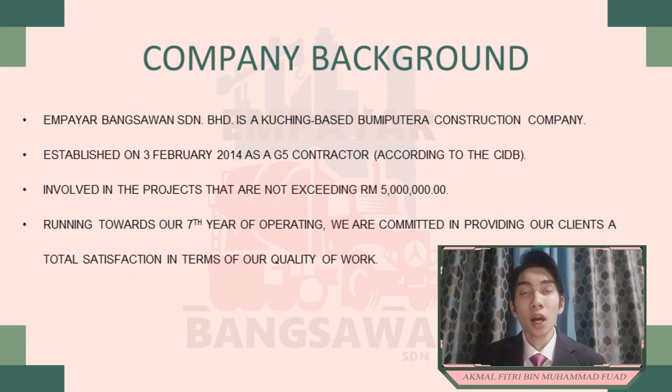I'm Akmal Fitri, and today I'm presenting Company Profile. First, Company Background: Empayar Bangsawan Sendirian Berhad is a Kuching-based Bumiputera construction company established on 3 February 2014 as a G5 contractor according to CIDB. We are involved in projects valued at not more than 5 million ringgit. Running towards our 7th year of operation, we are committed to providing clients total satisfaction in terms of quality of work.

Next is company mission and vision. Our mission is to provide the best construction to customers using our expertise in the design, manufacture and installation of building components, while our vision is to become one of the top Bumiputera construction companies in Malaysia.

Corporate information: Empayar Bangsawan Sendirian Berhad was started by our CEO, Muhammad Karani bin Idrus, and our DCEO, Angelina Belayau Anak John, in 2014. After that, they invited 8 people who specialize in construction to be part of the company's board of directors. With the assistance of dedicated professionals and staff, we offer specialty in various forms of construction including residential, commercial and industrial buildings. This is our company organization chart.

As mentioned, our CEO is IR Muhammad Karani bin Idrus, our DCEO is Angelina Belayau Anak John, and there are 8 other members of the Board of Director: Iffa Hazirah Izzati as Head of Human Resource Management, Melcom Mujim as Head of Project Department, Muhammad Ainim Shamim as Head of Quantity and Estimate Department, Patrick Carlos as Head of Land Surveying Geomatic Department, Bradley Terence as Head of Financial and Account Department, Ain Mishatul Wadah as Engineering Department Director, Noor Iman Anisha as Head of Building Safety and Building Maintenance, and Akmal Fitri, which is me, as Head of Building Plan and Contract Department. As of today, our company consists of 20 main staff and 10 supporting staff, each with their own responsibility or role in the construction process.

Meanwhile, from the financial institutions, we have borrowed 750,000 ringgit from two different banks, CIMB and Maybank, which totals up to 1.5 million too. Therefore, 1.5 million from the shareholders and 1.5 million borrowed from financial institutions totals up to 3 million ringgit. This is a list of machineries owned by our company.

Some of them are new, but most are used, second-hand. The reason we chose second-hand was to save our company budget, so we prefer to buy second-hand and used machineries. But we make sure all of it functions well and is well maintained before use, in order to prevent unwanted incidents. This is the tools and equipment that we have at the moment in our company. Most of them will be replaced manually as it is not necessary to be used repeatedly, unlike the machineries.

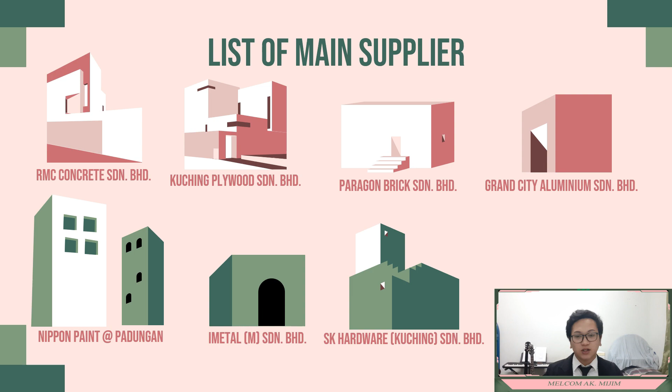This is some of our main suppliers for our construction material. They also provide credit facility to us, as we have already become part of their business partners.

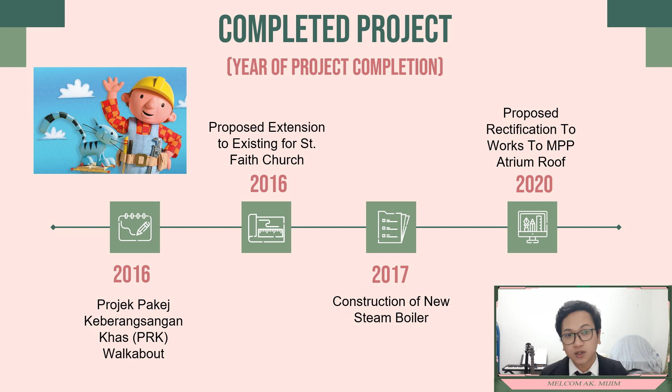In 2016, we completed a project package: keberangsangan khas PRK walkabout, proposed extension to existing St. Faith Church; in 2017, construction of a new steam boiler; and in 2020, proposed rectification works to MPP atrium roof and Majlis Perbandaran Padawan. Next stage is stage 2A, the preparation and submission of the tender document.

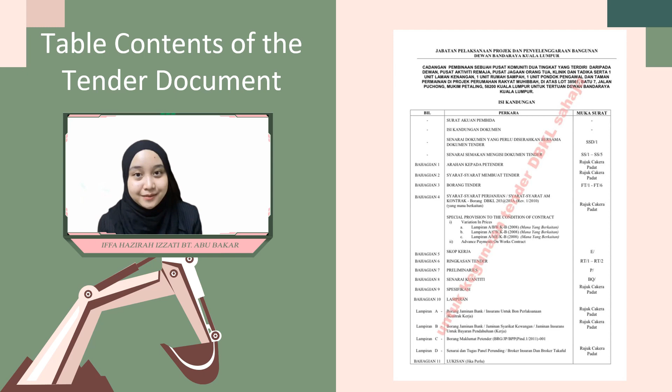This is the table of contents of the tender document from DBKL. We need to arrange all the documents based on this table of contents to avoid any mistake during tender document preparation. We also have a checklist right here.

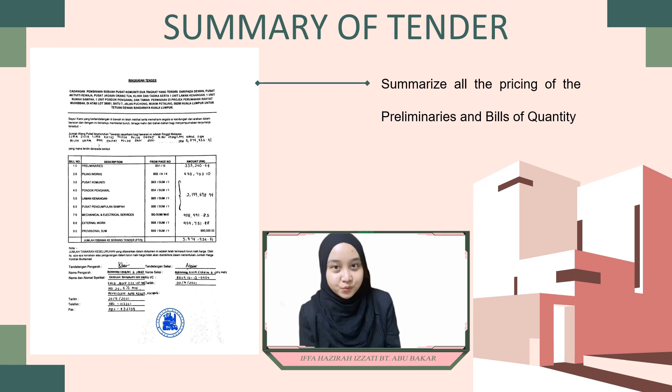The last one is summary of tender. This is the result of the pricing of the preliminaries and bills of quantity that we have counted. The total pricing is 5,574,936 ringgit and 41 cents. This is the price after we built up the rates for preliminaries work, piling works, building works, mechanical works, external works, and provisional sum.

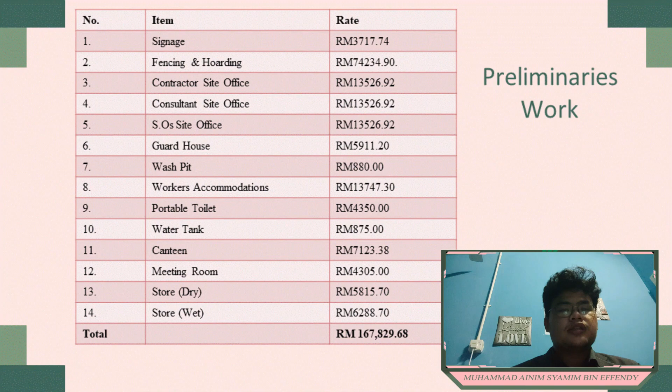The total rate for preliminary works is 167,829.68 cents. Next, in this drawing, there are all 14 items for preliminary works, the location of each item, and also the proposed building location.

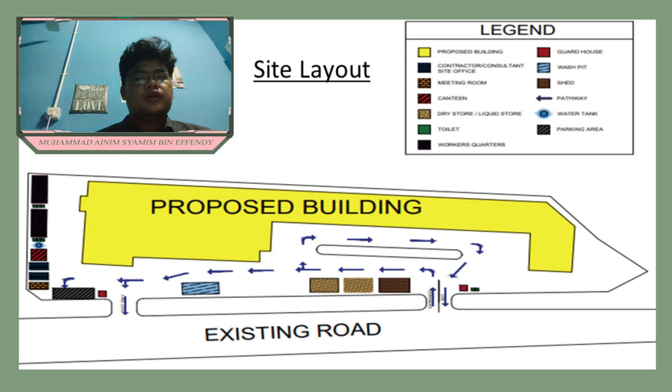Hello, my name is Angelina, and let's move on to build-up rates for building works. In general, build-up rates consist of estimation of price for works such as excavation, piling, formworks, reinforcement bar, concreting works, roofing, walls, doors, and windows.

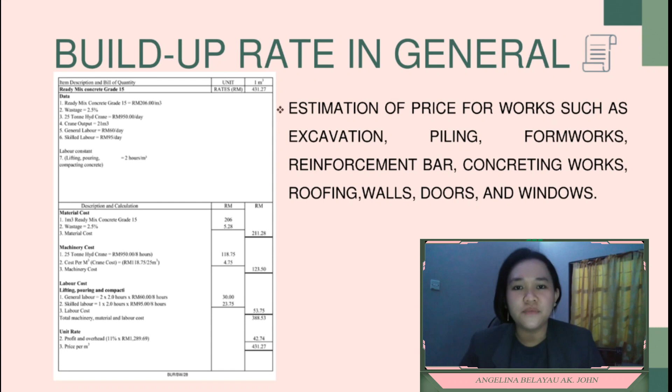Now, how are the prices in the build-up rate for building works established? Firstly, the prices are built up from material costs, labor costs, and unit rates. Sometimes machinery costs are also included, especially for works such as excavation.

Material cost is the cost of materials used to build the structures of the building. Examples of materials are cement, sand, aggregate, timber, etc.

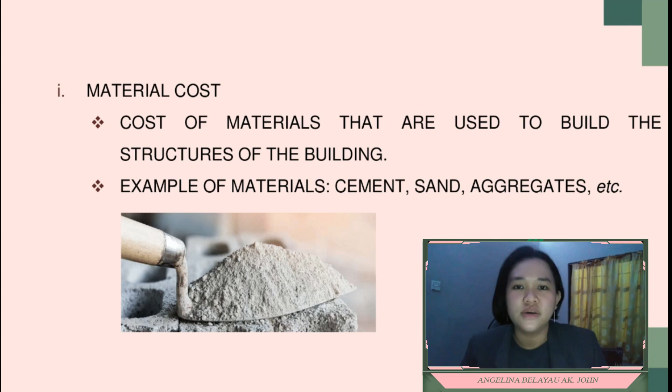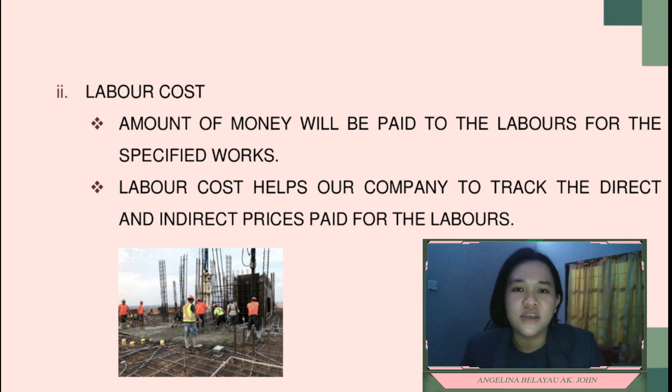Labor cost is the amount of money our company will pay to the laborers for the specified works they conducted. The inclusion of labor costs in the build-up rates helps our company track and determine the direct and indirect prices we pay for labor.

Unit rate is the allocation of monetary value to a unit of measurement for a given item in the bill of quantities. Unit rate is calculated by adding material costs and labor costs with profits and overheads. As a summary, the total build-up rate for building works is...

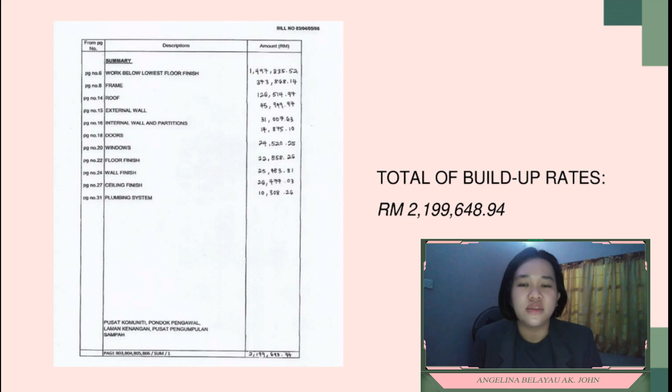2,199,648.94 cents. Next, we have the quotation of price for materials. Quotation of price is basically the estimated cost for a particular product or service.

Our company received quotations of price for materials such as ready-mix concrete, reinforcement bars, cement, fine and coarse aggregates, and others. These quotations of price for the materials are received from various suppliers such as Macro Dimension Sendirian Berhad, YTL Cement, Jong Empayar, SOCSO Enterprise, and other suppliers.

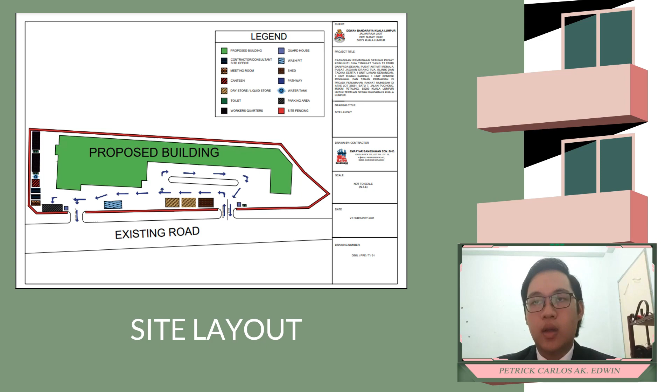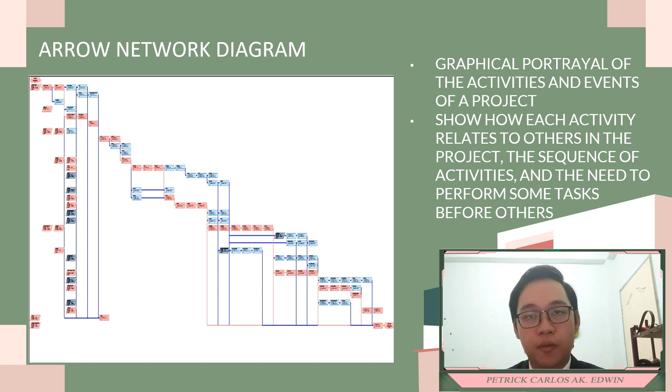The arrow network diagram shows how activities relate to the other project activities, the sequence of the activities, and the need to perform some tasks before other tasks. Next is cash flow.

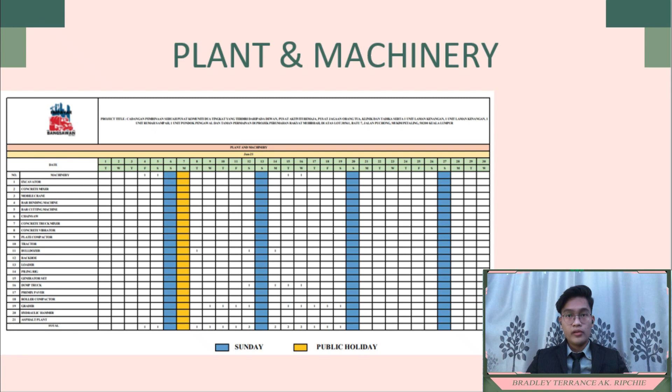Next is the plant and machinery schedule. Proper selection and planning of equipment is very important for every construction project. Planning of equipment depends upon the nature and quantity of work and the time available for completion. This is one example of our company's plant and machinery schedule.

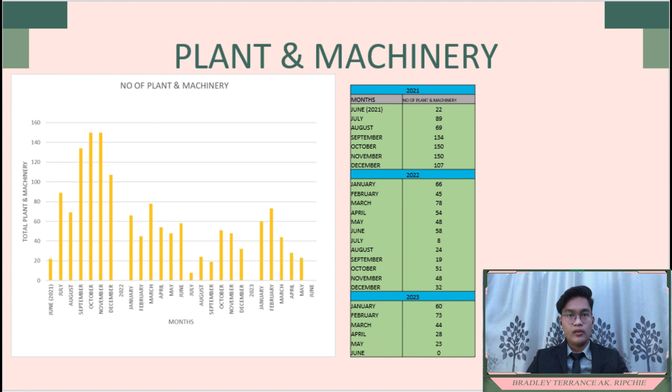Next is the bar chart for plant and machinery. The highest number of plant and machinery that we'll be using is 150 units per month, which is in October and November 2021. The last schedule is the material schedule.

Next I will present the method statement. Method statements are frequently requested as part of a tender and are intended to give the company an opportunity to show how they can provide the goods and service, and give the client insight into the company's methods of operation.

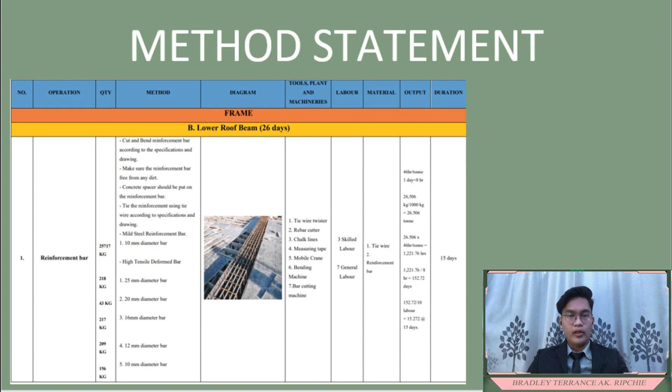Lastly for this presentation is the resource allocation list. In the construction business, resource allocation is essential to project management; maintaining control over and prioritizing team member allocation enables

the development of workforce planning methods that guarantee organizational objectives are fulfilled and projects are completed effectively.

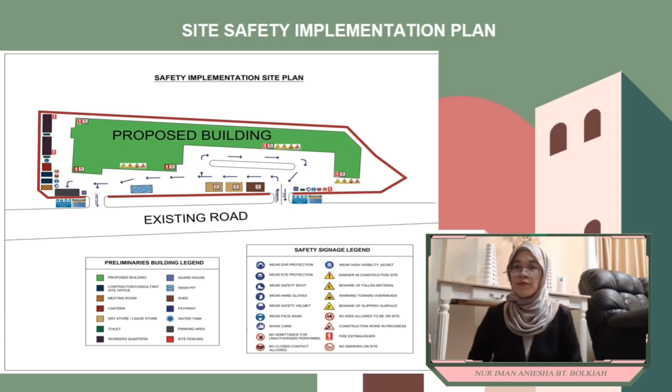This is our site safety implementation plan. Based on the site layout, we have already provided safety signage at site locations where it is important for workers' awareness of safety on site, to prevent any unpredictable happenings such as injury.

Daily work report: our site daily report has been prepared by the site supervisor, stating that the works carried out on 22nd of December 2021 include installing the reinforcement bar to the ground slab,

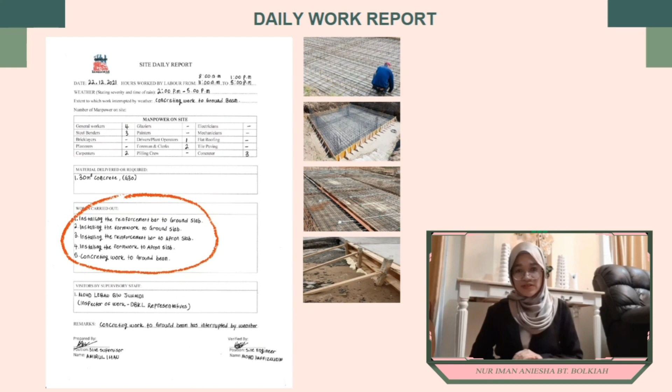installing the formwork to the ground slab, installing the reinforcement bar to the apron slab, installing the formwork to the apron slab, and concreting work to the ground beam. The type of grade concrete used for this work is G30.

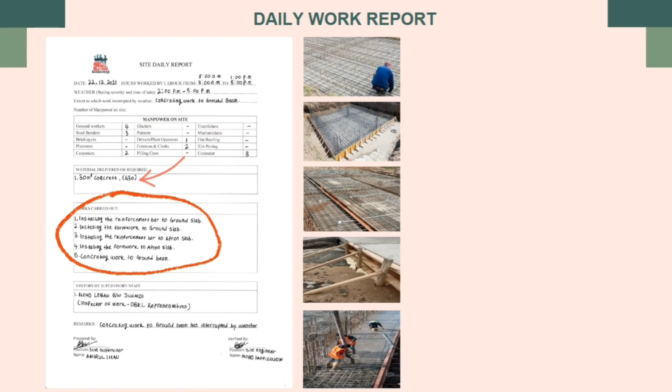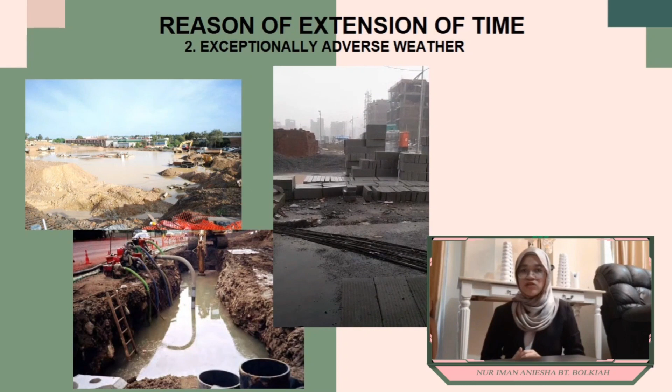Next, our company applied for EOT due to exceptionally adverse weather under clause 43.1b. We wrote a letter of application number 2 for this reason, and attached supporting documents as evidence where our site location was flooded due to the heavy rain that did not stop falling each day.

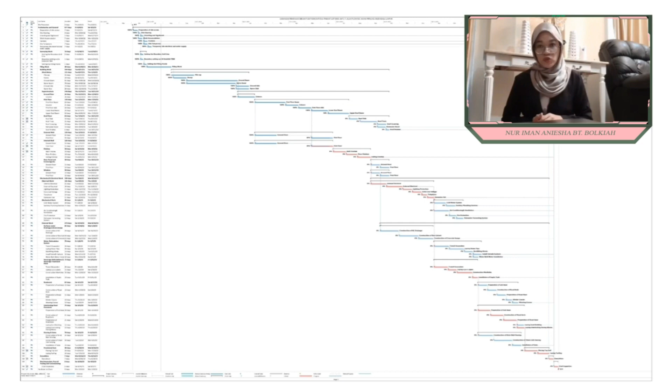This is our CPM that has been rearranged with the date of EOT approved by the authority. Based on this CPM, we made a new date for the sum of the works. The completion date for this project has been changed to September 3rd, 2023, including 3 months of EOT, where the original date was June 3rd, 2023.

Assalamualaikum and a very good day. My name is Muhammad Khairani bin Idruse, and there are 3 things I am going to talk about: number 1, monthly progress report; number 2, monthly progress claim; and number 3, Certificate of Completion and Compliance.

The first one is monthly progress report. Monthly progress report is a report prepared by a contractor every month about the progression of construction work at the construction site, and this report will be issued to the client. There will generally be a summary of the reports received and discussion held at the construction progress meeting, or today we can call it a site meeting.

Construction progress report may include contract information, executive summary, master work program, summary of progress claim, schedule of manpower, material, plant and machineries, variation order, quality assurance and quality control, weather report, and last but not least, progress photographs.

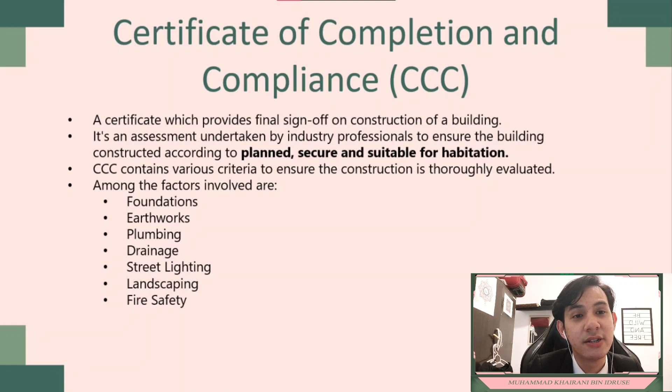Next, I'm going to explain about G-Forms. G-Forms are the forms used to comprise a 21-stage certification required for completion throughout the project. These forms give approval for different elements such as earthworks and drainage systems as mentioned earlier, and they are important for CCC. There are 21 stage certifications, and all these forms are required for completion throughout the project.